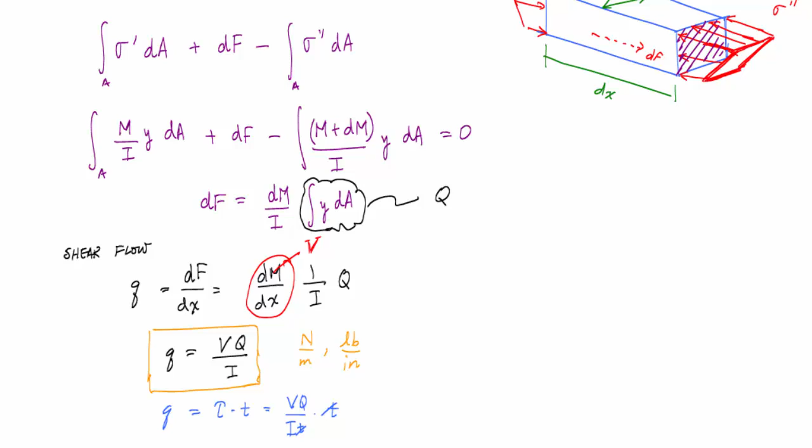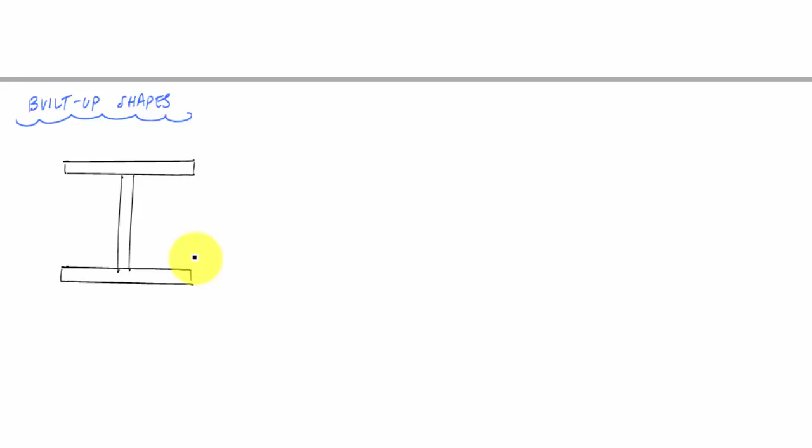One of the ways this is really important is for built-up shapes in flexural members. Sometimes you want to build a cross section out of a bunch of other parts. For instance, you want to build an I-beam out of 3 steel plates to make an I cross section. So what you've got to figure out is how strong or how much weld you need to connect these plates, and shear flow is the way that you would do that.

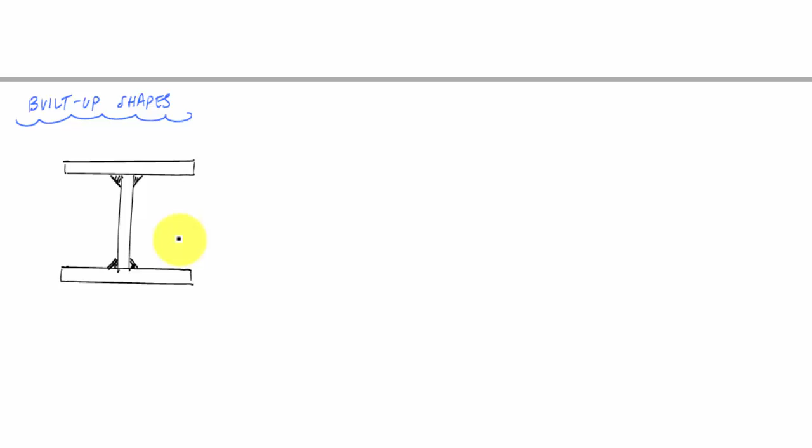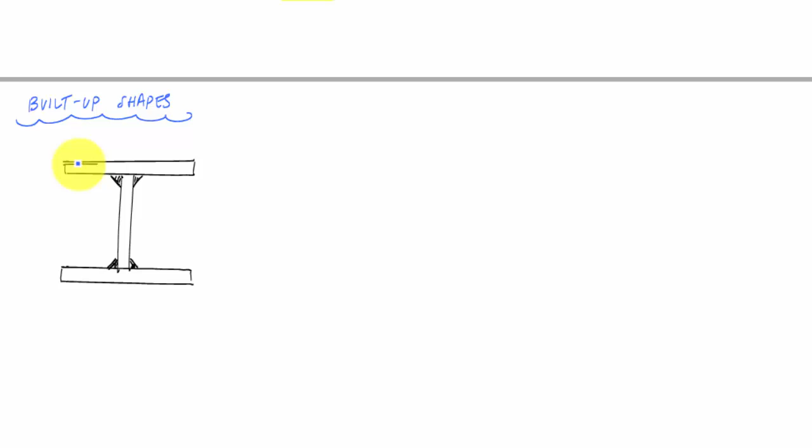Or maybe this I-beam that you get from the plant that fabricated it for you is not enough, and you need a way to make this thing stronger. So maybe you'll add or bolt channel shapes to the top of this thing, so you end up with a cross section that looks like this. You might bolt those here, at the top and the bottom, some bolted channel shape. Imagine this is going to be symmetric.

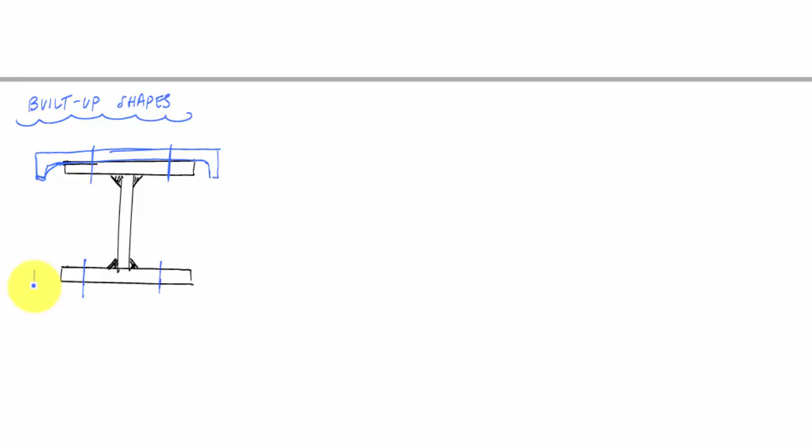Yes. And so the question is, I need this for the length of the beam, and the beam is coming out of the page, if you will. The length of the beam is coming out of the page. And I've got to know, what should the strength of these bolts be? How many? What's the spacing that I need for these bolts? And shear flow is the way that we are going to answer that question.

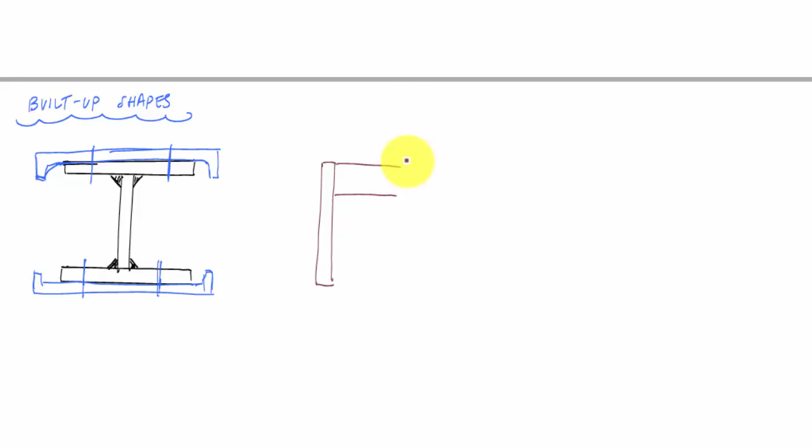And in fact, you might do it with wood, right? You might have wood, maybe some 2x4, or some plywood that I cut. So I can use that for the shear, with a little bit of 2x4s here and here. And I want to build this beam cross section like this. And I nail into the sides, right here, and then a little nails here.

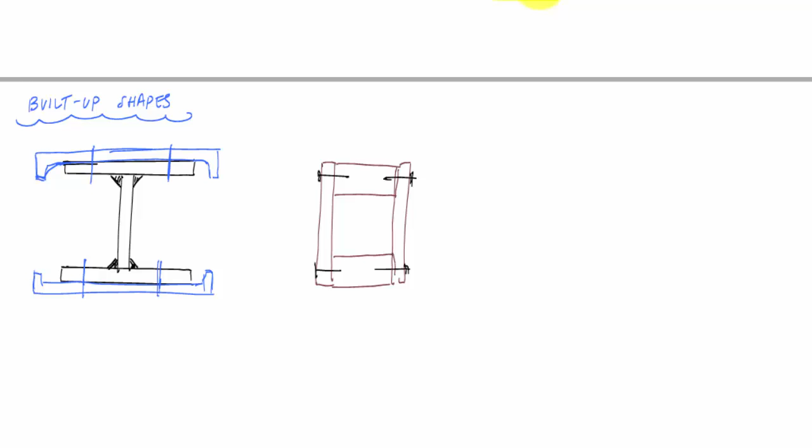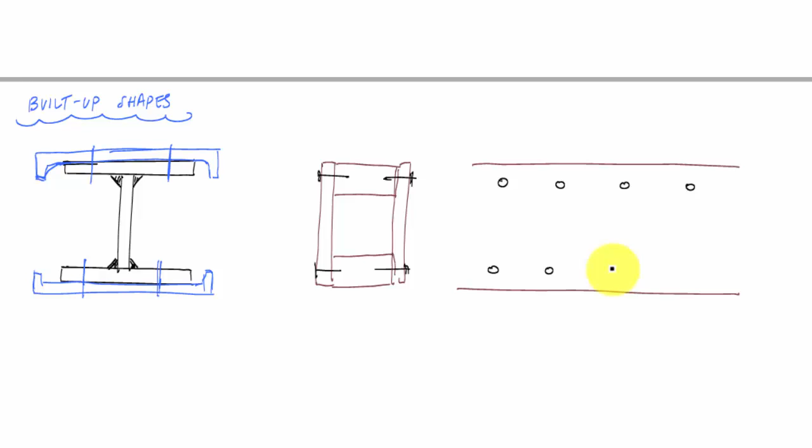And then if I looked at the side view of this beam, what I might really see is that this beam would be acting like this. And I want to really know what the spacing of these nails is, or even the diameter of these nails that I need to hold this beam together and resist the load. What is this spacing of the nails? These are good, important questions for us to ask so that we don't over design or have not enough nails and have this thing fail prematurely.

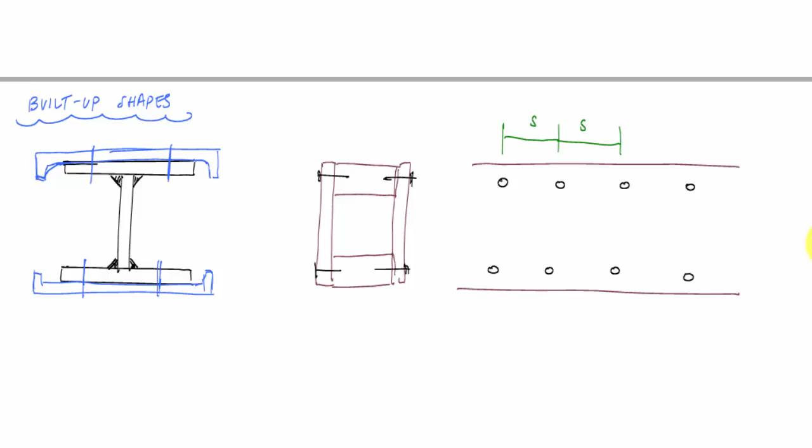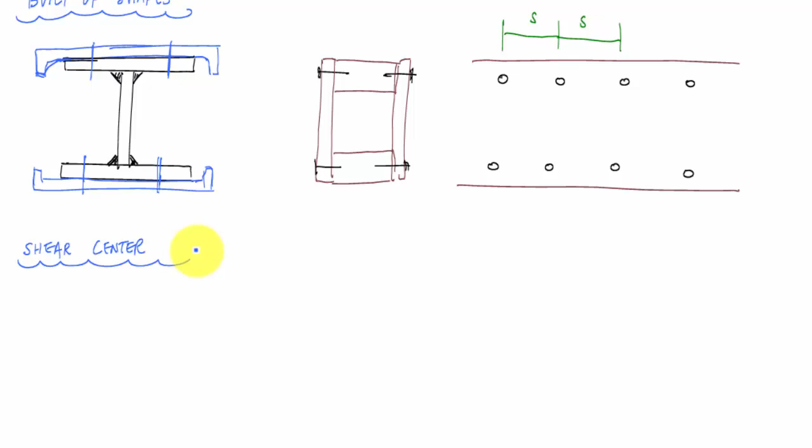Another application for shear flow is to find the shear center of a cross section. And the shear center is important to know, especially when you have transverse loading for a cross section without a vertical axis of symmetry.

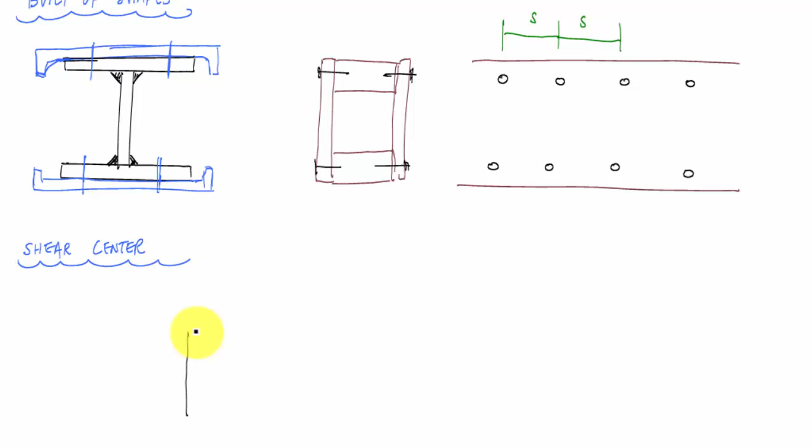What does that mean? For instance, let's say I have a channel shaped cantilever, oriented like this, and it's fixed to a wall back here. What happens is there's a geometric centroid for this cross section. You see how this doesn't have a vertical line of symmetry? There's no vertical line of symmetry here. So here I have the centroid of my cross section right here.

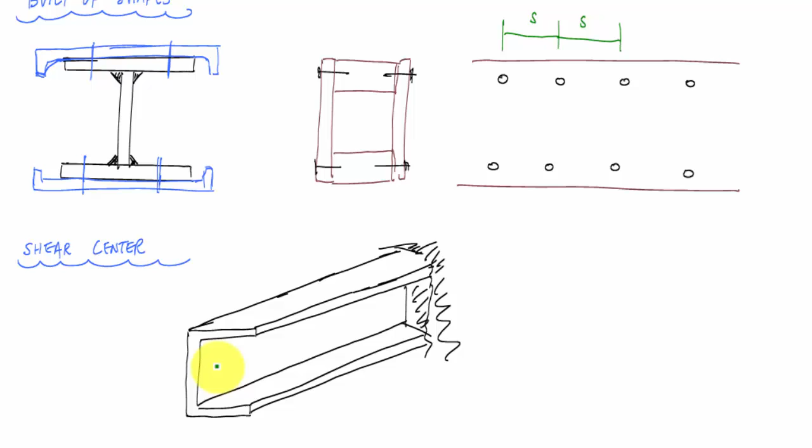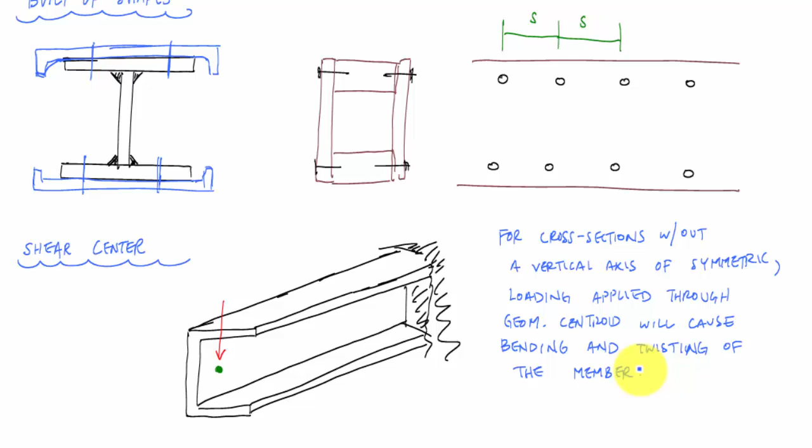What's going to happen when I apply a load through the centroid is it'll end up causing bending and twisting, or torsion. So we'll get some sort of combined loading condition because of the lack of vertical axis of symmetry. So you could use the shear flow to find what's called the shear center. The shear center is some point, here I'll draw it in red, some distance e away from the centroid that would represent the shear center. This dot right here might be the shear center for this channel shape.

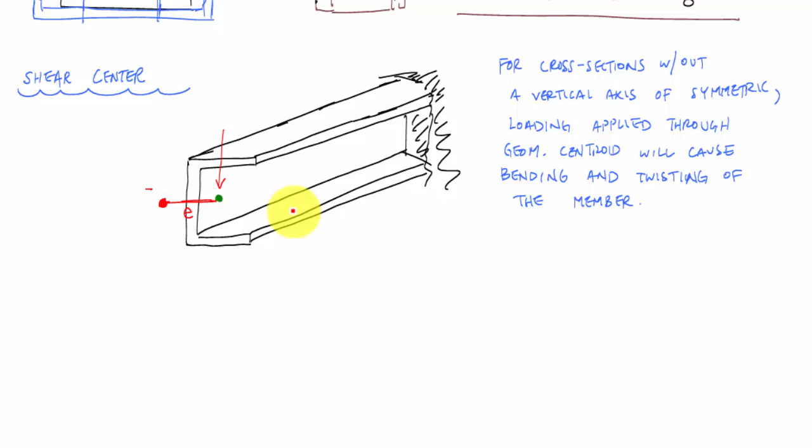So that if I apply a load through the shear center, it will only result in bending without twisting or torsion. And this load, I didn't draw it straight on purpose. As long as that load is applied in that plane through the shear center, I will just get bending. It could be biaxial bending, but there will not be twisting.